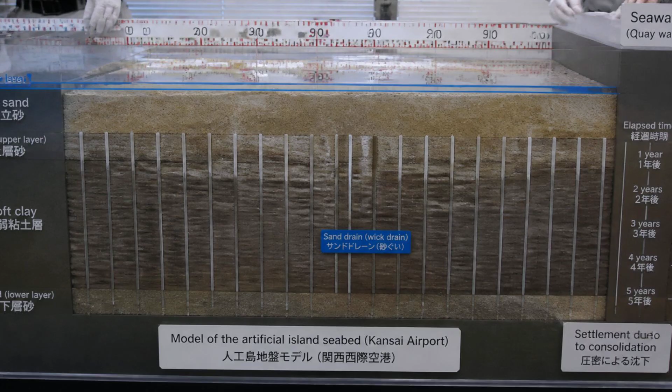5 kilometers off the coast of Japan, a single rectangle of light sits in the middle of Osaka Bay. It is an airport, a $20 billion airport. And since the day it opened in 1994, the ground beneath it has been sinking. Not because something went wrong, but because engineers always knew it would. The island has already dropped over 12 meters.

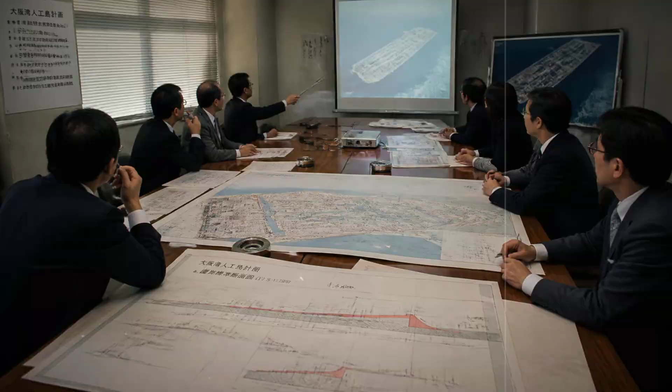It has not stopped. In the 1970s, the Kansai metropolitan region faced a severe infrastructure bottleneck. The existing airport at Itami was congested, hemmed in by dense urban development, and restricted by strict noise limits. Japan needed a major international gateway, but there was simply no mainland territory available near Osaka for expansion. The Ministry of Transport turned to the open water, planning an artificial island 5 kilometers out.

Building offshore solved noise complaints and bypassed land acquisition disputes, but reclaiming land in deep water required over 180 million cubic meters of soil. This pushed the construction budget to 910 billion yen, placing it among the most expensive civil works of its era. When commercial operations began that September, the project represented a calculated choice.

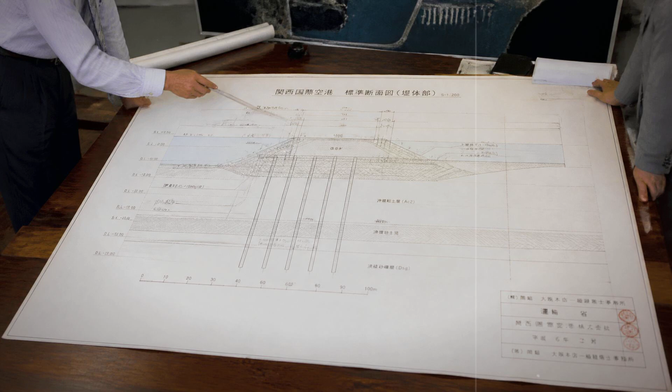Planners did not build over the water because they believed the seabed was solid. They proceeded fully aware that the soft marine clay beneath the waves would compress under the weight of the new runway. From the initial design phase, settlement was not an unexpected failure, but a known physical reality that engineers accepted from the moment of commitment.

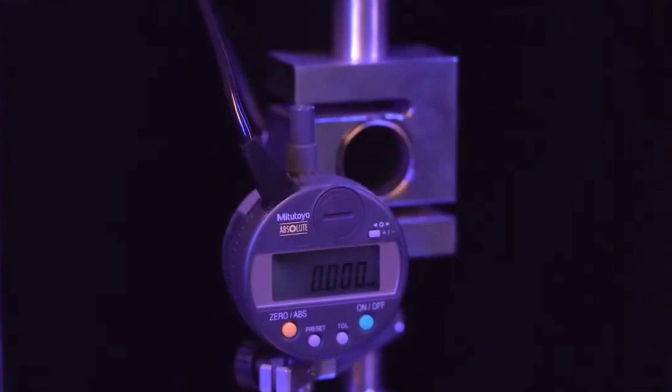The bay floor is dominated by a 20-meter thick layer of Holocene marine clay. This soft alluvial mud consists of up to 80% water, presenting an easily compressed structure with extremely low permeability. When loaded with millions of tons of rocky fill, the trapped pore water cannot easily escape, causing the soil underneath to deform over generations. Engineers knew they could not prevent this compression, so they focused on accelerating it.

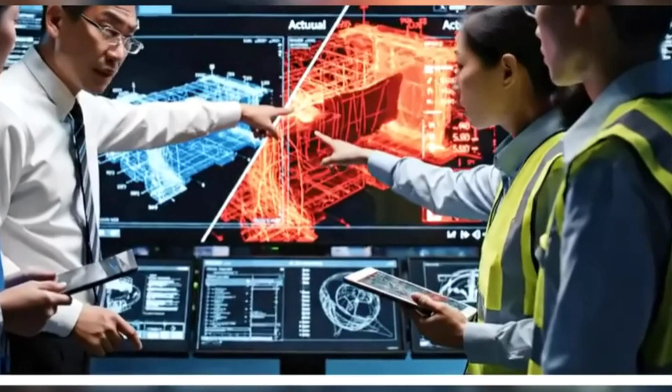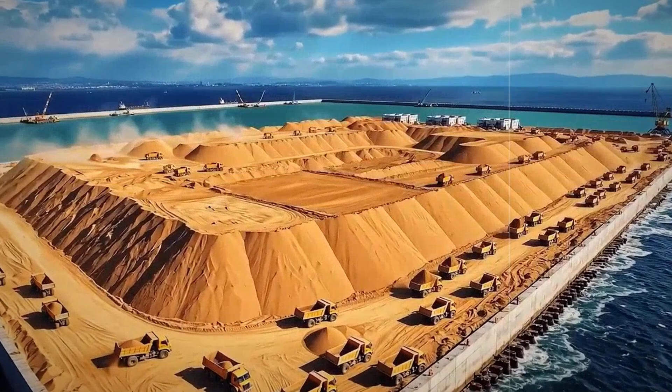To control the timing and scale of the sinkage, construction teams drove hundreds of thousands of vertical sand drains into the seabed clay. These columns acted as escape pathways, allowing pressurized water to drain outward under the heavy weight. Before laying the runways, crews applied massive surcharges of soil, preloading the island to force rapid consolidation. This squeezed out the water within a year rather than decades.

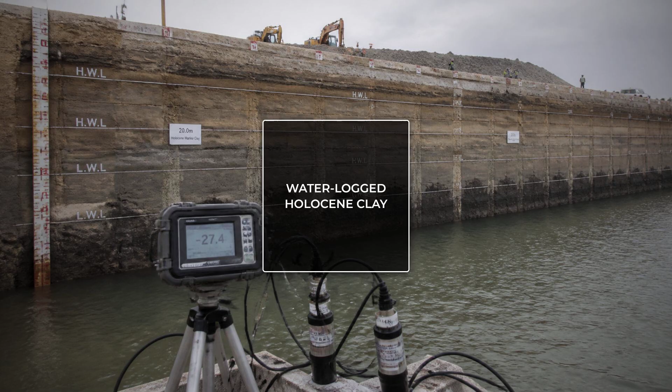The goal was never to halt the descent, but to force the majority of the settlement to occur before operations began. This systematic dewatering transformed the unstable alluvial layer into a compacted foundation, managing soil physics to secure structural stability.

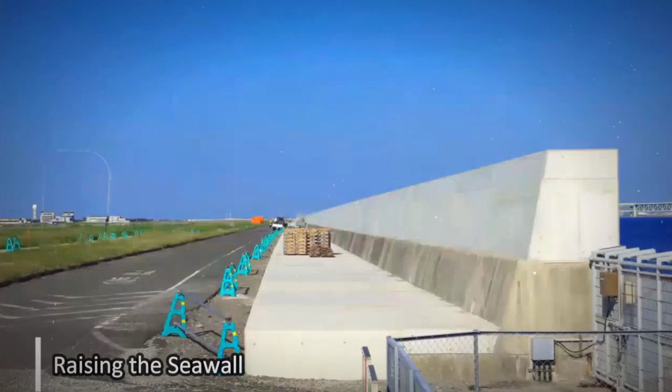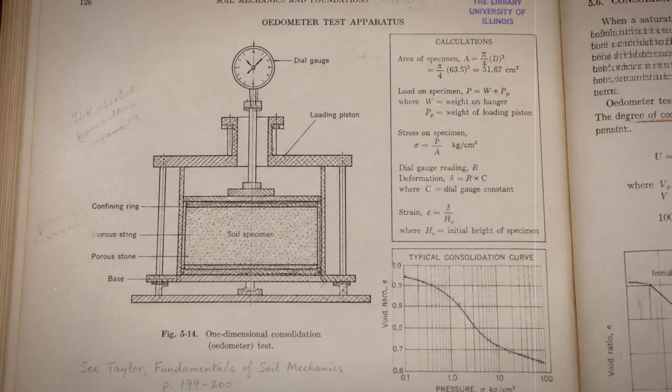The mathematical models developed by the Port and Airport Research Institute projected a total settlement of 5 to 6 meters over the first 30 years. Based on classic consolidation theory, these calculations assumed the compression of the Holocene clay would stabilize within a predictable window, leaving the runway safely above the high tide line.

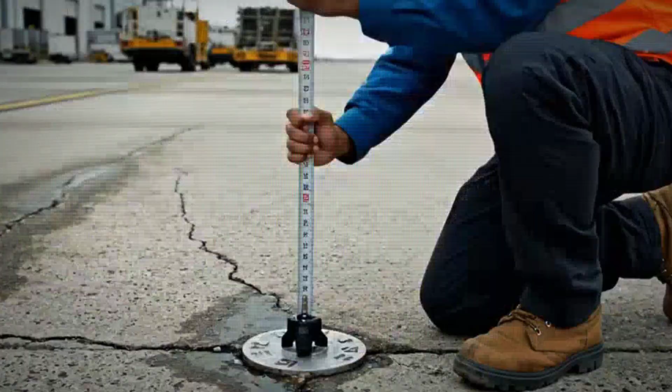But as the reclaimed island was completed and the weight of the terminal was applied, the seabed behaved in ways the equations had not predicted. Instead of stabilizing, the downward movement continued. By the time the airport had been open for less than a decade, the ground had already dropped far past the 30-year estimate. Today, Island 1 has settled well over 12 meters since construction began, more than double the original design forecast.

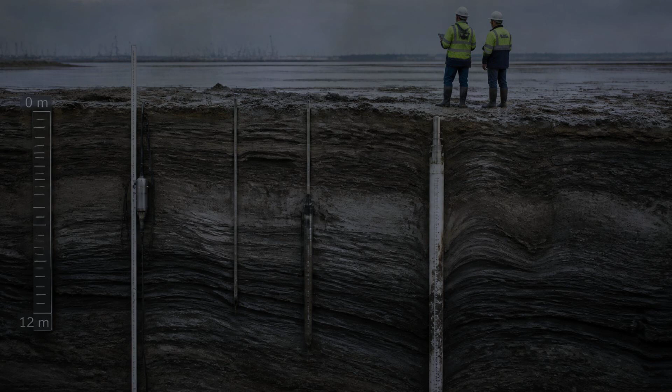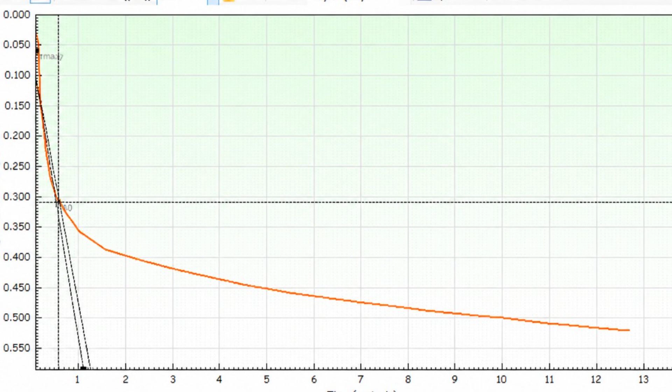This massive divergence arose because the standard geological models underrepresented secondary compression, the slow plastic creeping of clay under constant pressure that persists long after the initial pore water has been squeezed out. This gap between calculation and reality forced a shift in how the project was managed.

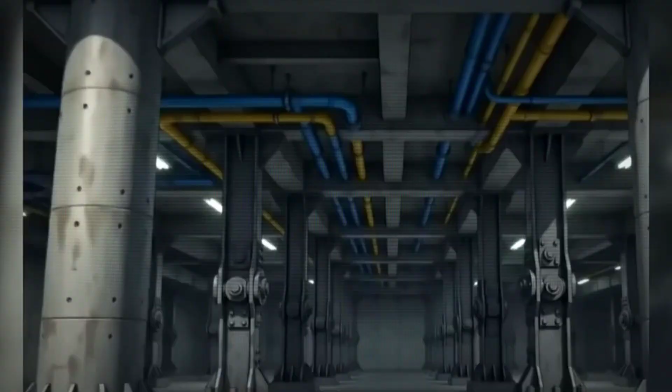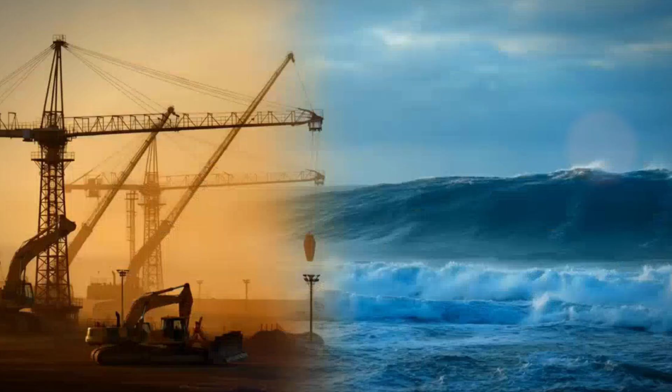To track this continuous descent, engineers established a rigorous monitoring network, transforming the sinking island into a live geotechnical laboratory. Every millimeter of downward movement is recorded by laser levels and settlement plates, creating a permanent record of how a colossal human structure interacts with the shifting forces of the bay. The measured data did not just reveal a temporary miscalculation, it established a continuing engineering record that would redefine construction on soft marine soils.

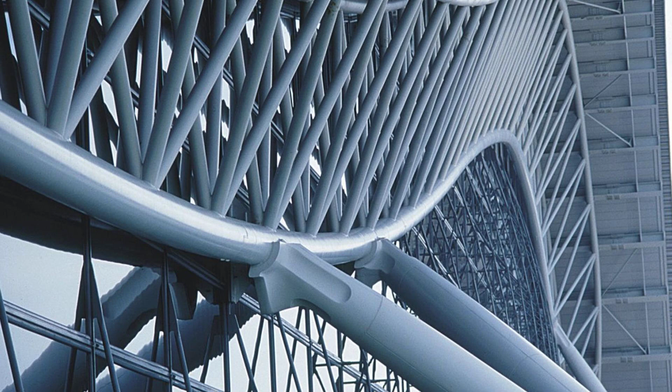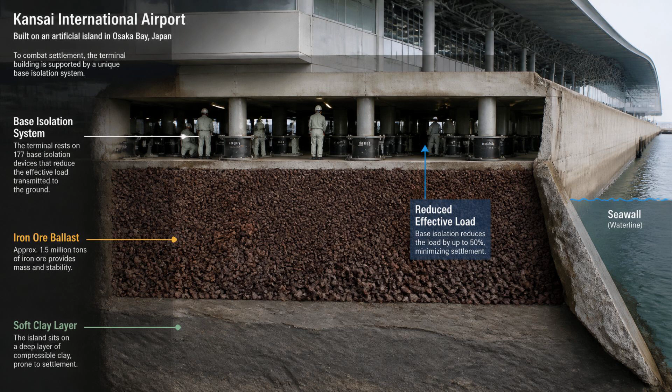Architect Renzo Piano designed the 1.7-kilometer main terminal with an active structural system capable of constant movement. The building does not rest on a rigid foundation. Instead, its immense weight is carried by approximately 900 adjustable support columns. To limit overall settlement, designers even filled the basement with iron ore ballast, reducing the net vertical load on the clay below. Each support column is equipped with a specialized hydro-pneumatic jack assembly.

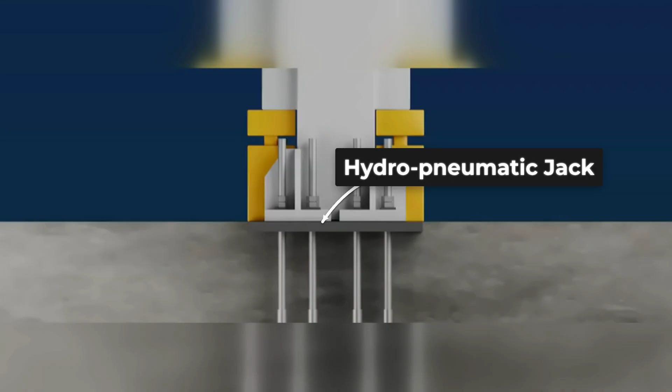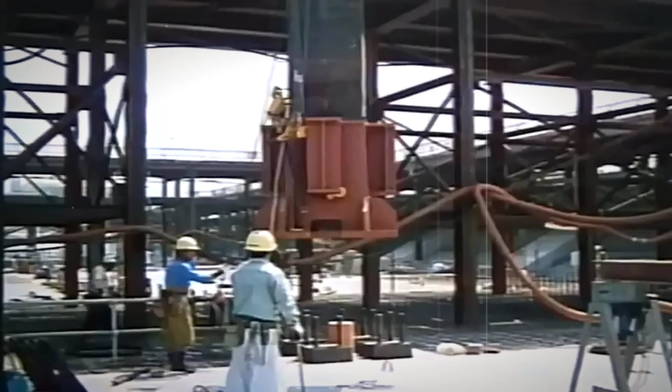These hydraulic units allow maintenance teams to raise or lower individual sections of the terminal with mechanical precision. Rather than a static monument, the building operates as a moving structure that must be actively balanced to remain functional. Automated tilt sensors continuously monitor the terminal, reporting any deviation greater than 2 millimeters. When the ground settles unevenly, maintenance crews step in to correct the alignment.

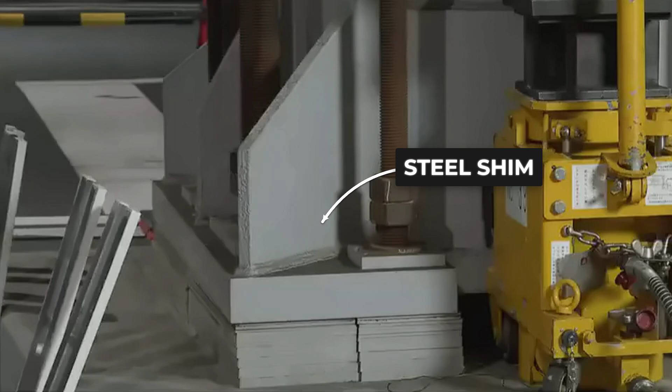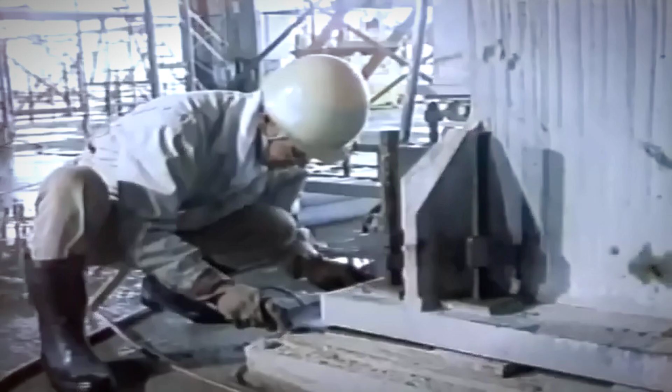Using the hydraulic jacks, workers lift the targeted columns and insert thick steel plates directly beneath the base to restore the building to its original design height. Once these steel shims are secured, the jacks are released, transferring the structure's weight back to its newly raised support. This careful process is repeated column by column across the entire footprint of the terminal. The viability of the massive building depends entirely on this ongoing manual correction, transforming basic maintenance into a continuous engineering operation.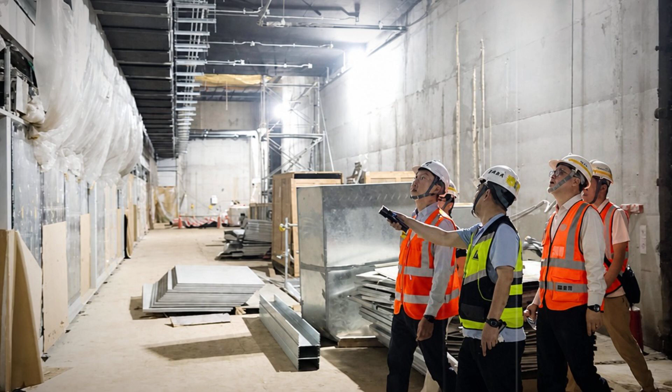If the entire island sank at a perfectly uniform rate, the terminal would remain structurally intact, simply sitting closer to the sea. The true danger is differential settlement, the uneven downward movement of the ground beneath different sections of the building. When one zone drops faster than another, it introduces structural tilt, placing immense bending stress on the steel frame and glass facade. For structural engineers, the primary threat is not the overall loss of elevation, but these localized height variations. Without active correction, the shifting bay floor would slowly pull the building apart.

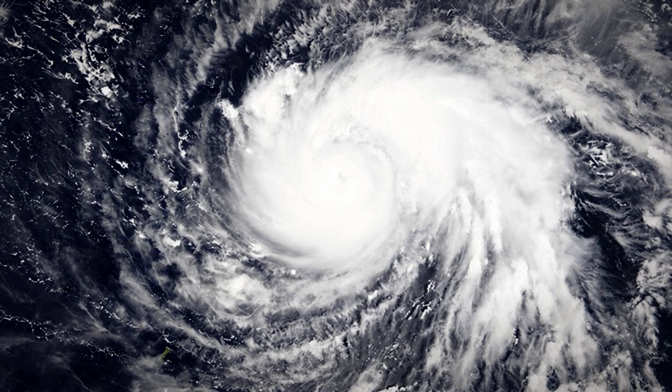On September 4, 2018, the engineered stability of the island faced its ultimate stress test. Typhoon Jebi, the strongest storm to strike western Japan in 25 years, swept into Osaka Bay. The system drove a 5-meter storm surge directly over the airport's protective seawalls, rapidly inundating the runway and flooding the terminal's lower basement levels. As power failed, conditions deteriorated offshore.

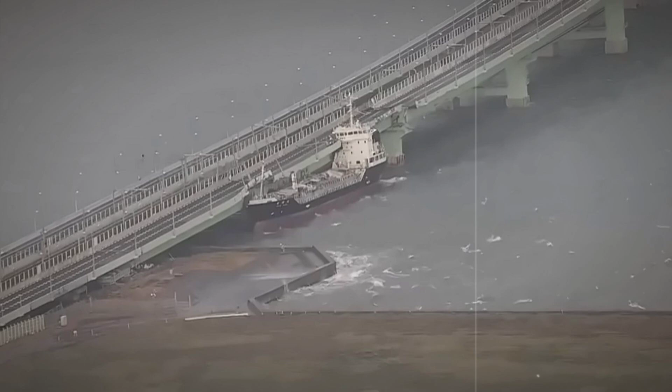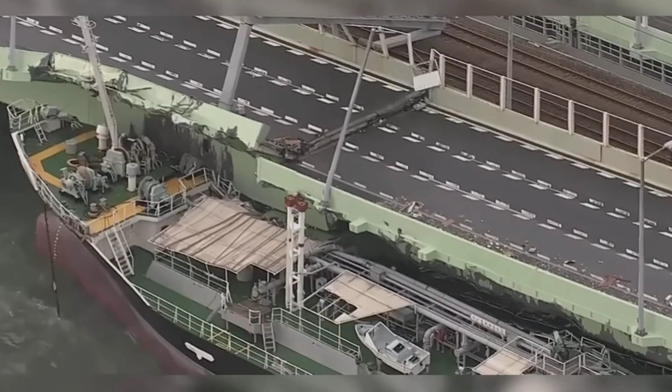Extreme winds ripped the 2,591-ton tanker Houn Maru from its anchored position. Drifting out of control, the heavy vessel slammed into the Skygate Bridge, the sole road link between the island and the mainland. The impact fractured the steel deck and severed utility lines, immediately stranding 3,000 passengers inside the dark terminal.

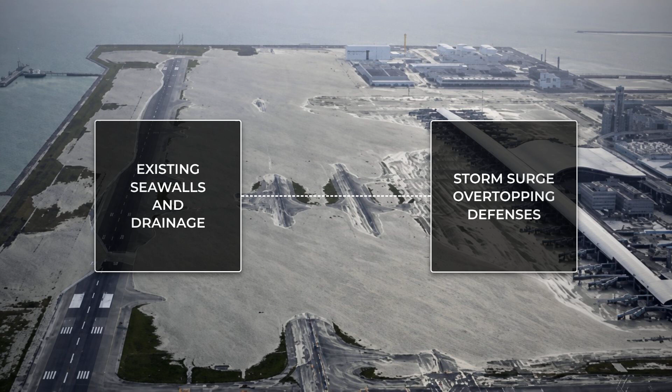Airport operations teams and emergency responders faced a double crisis of severe inundation and structural failure. While the facility had spent decades adapting to the slow compression of the seabed, this sudden environmental shock bypassed those long-term defenses, leaving the massive complex completely isolated in Osaka Bay.

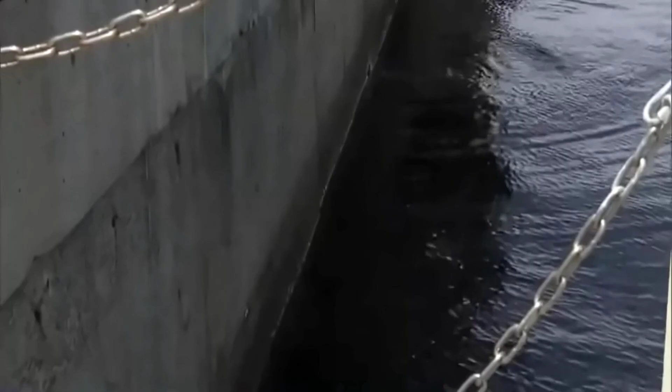Following the 2018 disaster, the operator, Kansai Airports, initiated a series of defensive upgrades. Engineers raised the primary seawalls by 2 meters, reinforcing them with concrete armor to block future storm surges. To prevent another power failure, essential electrical systems and communications equipment were moved from the vulnerable basement levels to the 4th floor of the terminal. Crews raised the runways by up to 1 meter using staged nighttime asphalt paving.

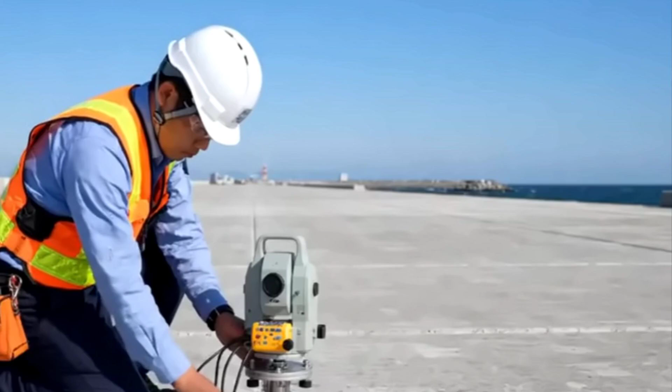Today, the island's descent has slowed to a measured rate of 2 to 3 centimeters per year, but the sinking has not stopped. This continuous subsidence, coupled with projected sea level rise, narrows the airport's physical safety margin. Yet, Kansai remains fully operational. By managing this shifting baseline, the facility successfully serves over 31 million passengers annually, proving that reclaimed land can be sustained through relentless engineering vigilance.

Kansai remains fully operational, a triumph of modern engineering. Yet as sea levels rise, its quiet daily struggle reveals our broader future. We do not conquer nature, we only negotiate the terms of our stay.